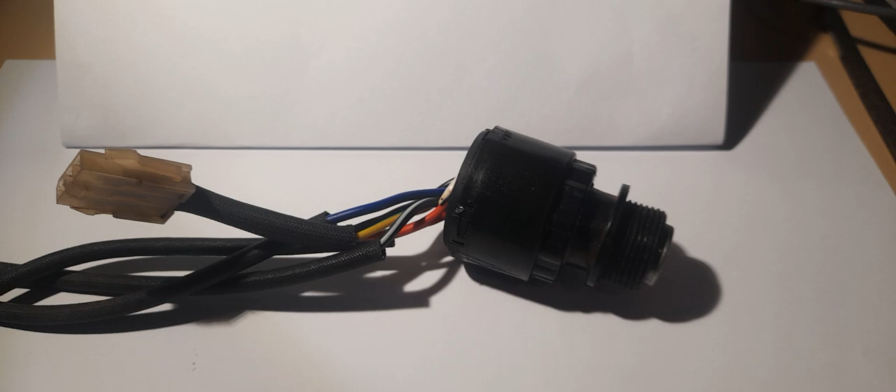Just a little video to explain how to pull apart one of the starter motor switches. This is off a Zongshen gb1000, which Jono and Jonno here in Australia sold us a jde1000.

They're very susceptible to dirt contamination, especially when you're using it in a dusty or dirty environment like I do. After a while they just clog up and you need more and more force to get the key to turn. Then eventually they won't turn, and eventually they break. It's the bit inside that broke, then the key just spins around and doesn't do anything.

Now to get them apart, you just lever up these little plastic tabs. There's a metal sheath over the top - you just knock that off, and then lever up that little tab there, that little tab there. Then this whole top plate pops off.

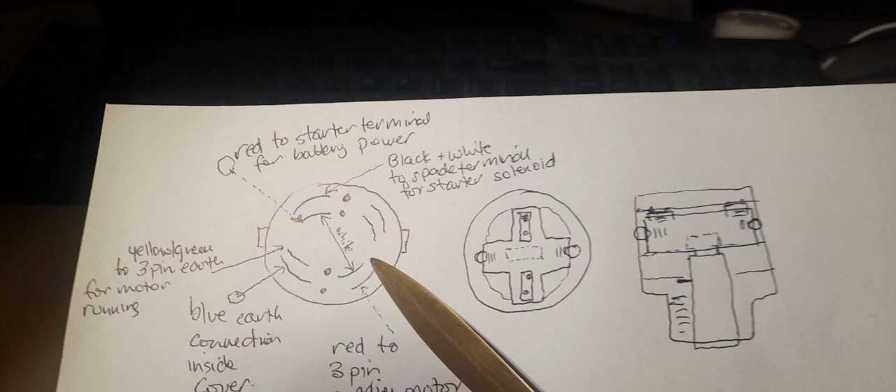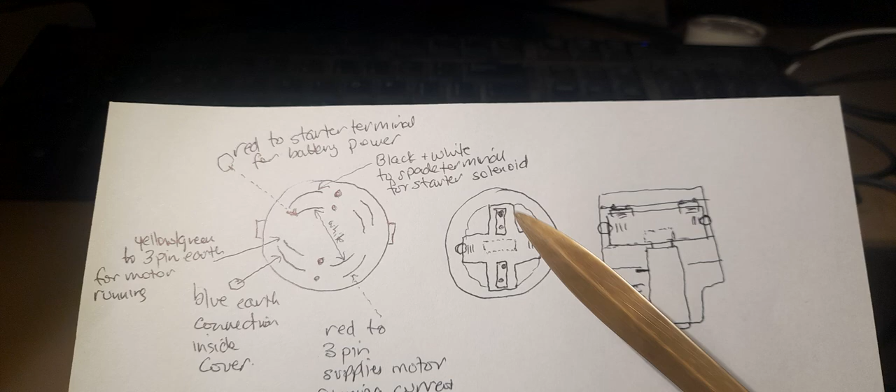Underneath the top plate you've got metal half little circular tracks, 8 of them. The some one entire section isn't connected, but the others - if you look at the little wiring diagram I put there, it explains what happens as you turn the key. It turns this little section here, which has got 2 sets of double contacts on it, and as they turn around they just make contact in between the tracks in various configurations.

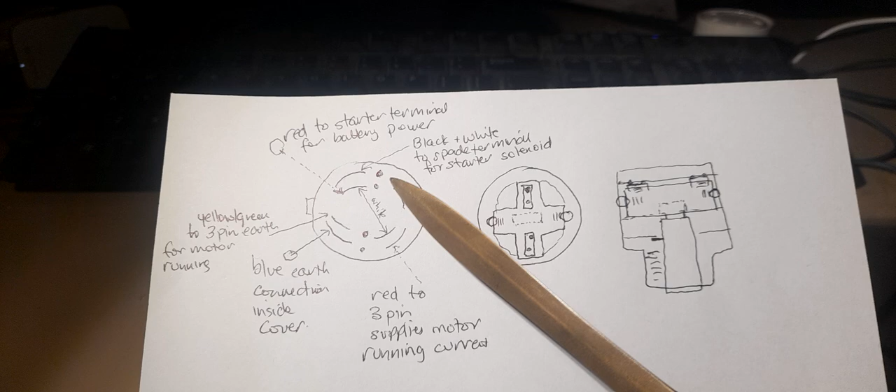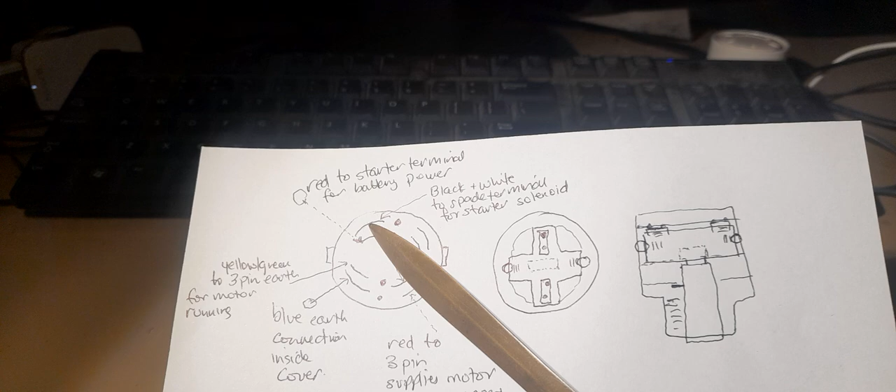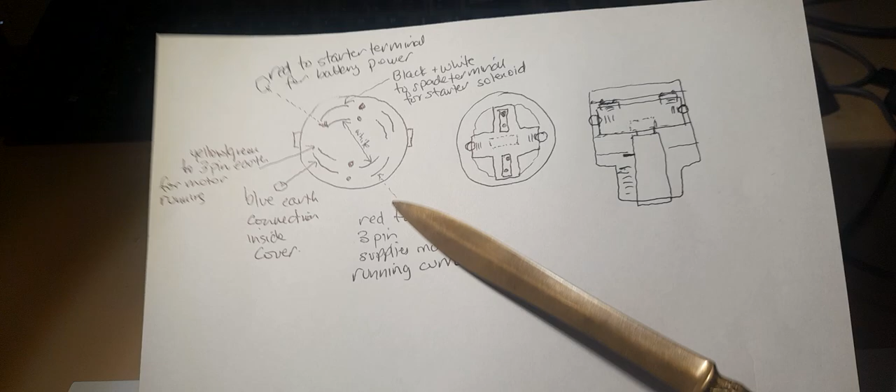There is a white wire inside that joins that track and that track, so that as it turns, the power comes in. Where does it come in? Oh anyway, it comes in on that one there, and as the contacts are made, it joins up here and then flips across to these ones here and supplies out the red terminal in there, the red wire going to there, and that supplies power to the motor for running.

And then the black and white one is connected to that one. So as it contacts there, that supplies power out to the spade terminal going to the solenoid on the starter motor.

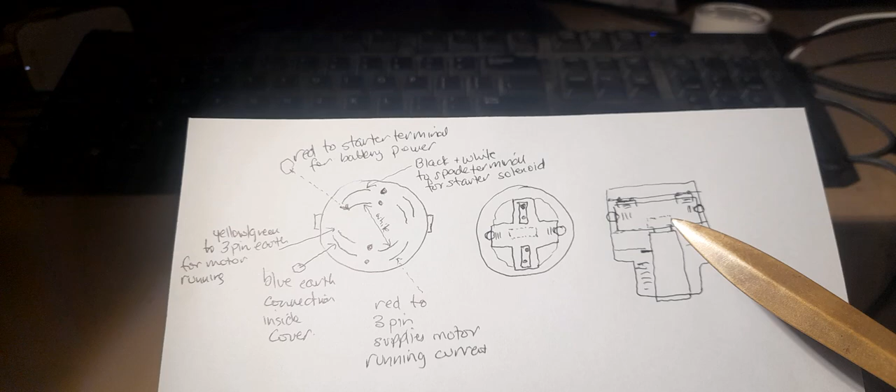Now the key goes in here, but then this little bit here is that plastic - crappy design, because as all this clogs up with dirt it becomes harder and harder to turn, and after a while you maybe just put a little bit too much force on it, or you've done it once too often, and that little bit there breaks off. And then the key just spins around.

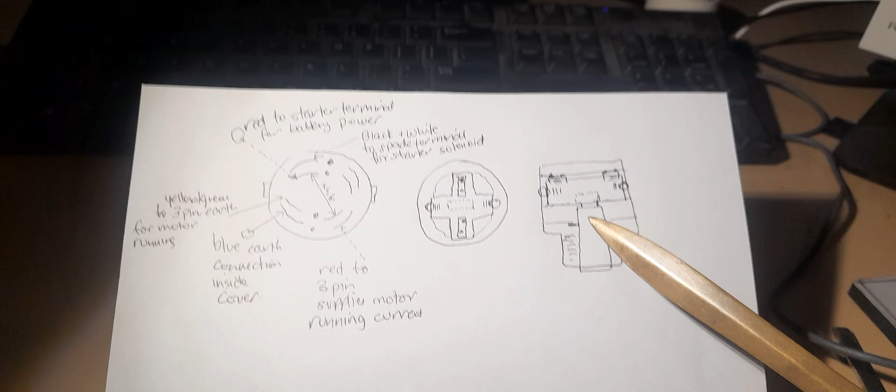Now as you pull this apart, keep a very good mark on the case and a good mark on this top plate so that you get the alignment back up in the right place. And the white contact holder inside, make sure you mark - hang on, where's my focus gone?

This white contactor plate in there, that can go in 2 or 3 different ways, so make sure you give it a good mark so you know exactly how to put it back in, because this has got a little spring wound around it here that connects to the case, and that gives you the spring for the starter actuation. That can go in a couple of different ways, so make sure you mark it.

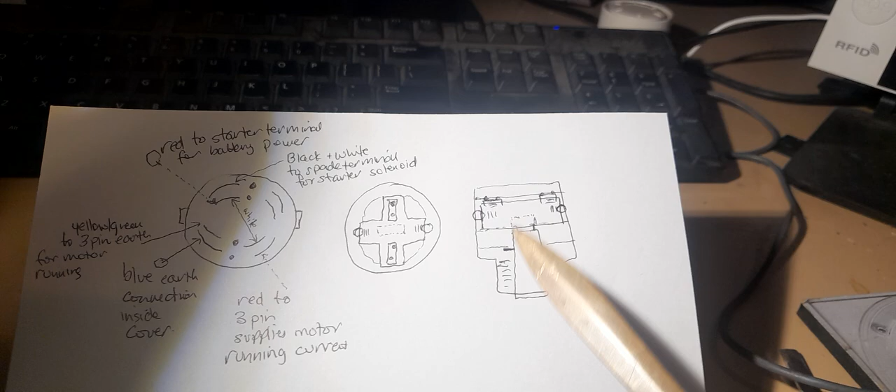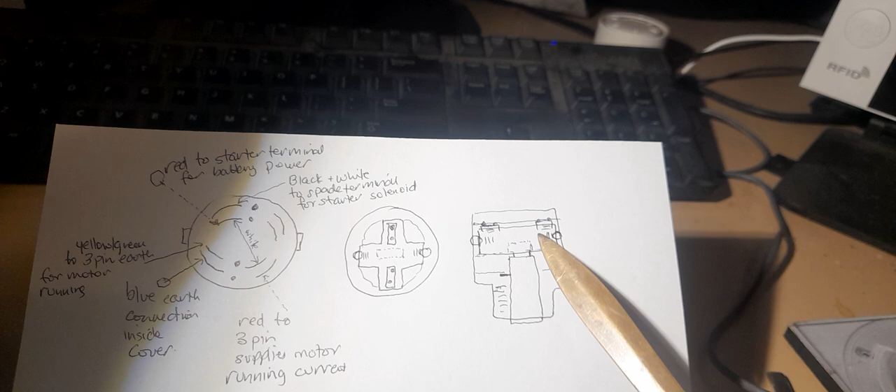Now these 2 little balls here give you the detent effect on this plate, and there's a couple of little springs in there. When you pull this out, the balls will tend to fly out, so just be very careful as you lift this up, and it's not too hard to fit the balls back into place as you push it back in again.

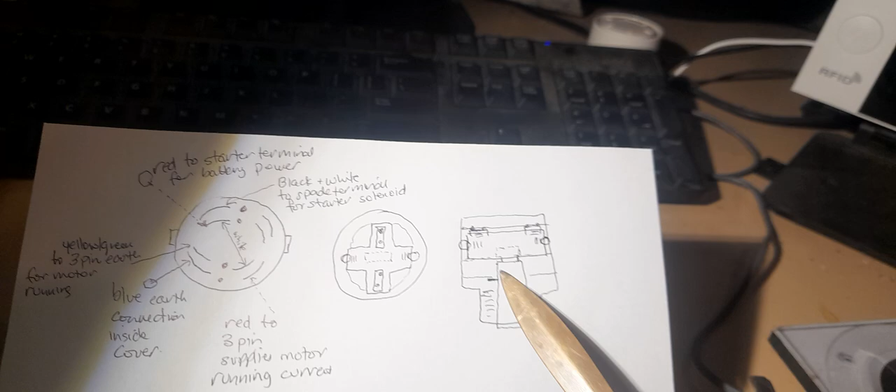Now what I did, there's a little, what's in effect a little circlip just there, just a little plate, and if you get a screwdriver or something like that and just push it back over, this whole lock mechanism falls out the bottom.

And then what I did was just removed all of it, because the key's not long enough to actually go right up there into that top plate. When this is broken off, once you've got it out, you've got an 8mm slot just there that this fits into, but the key's not quite long enough to go into it.

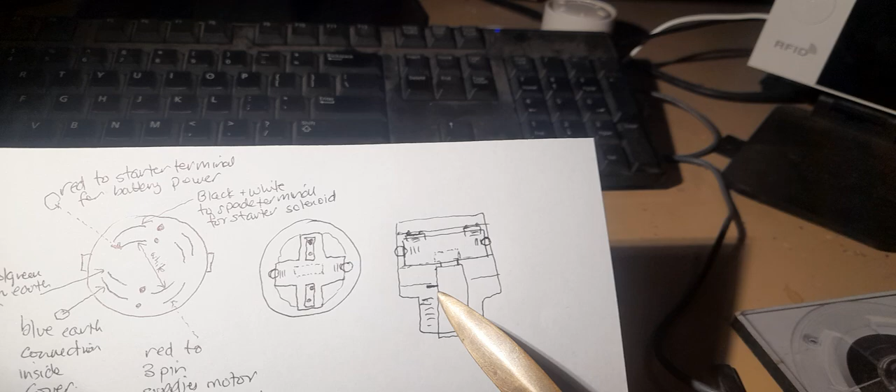So what I did was, after I dropped this out, moved that little plate across, dropped this out, I took all of the little locking pins, little locking plates out of the lock.

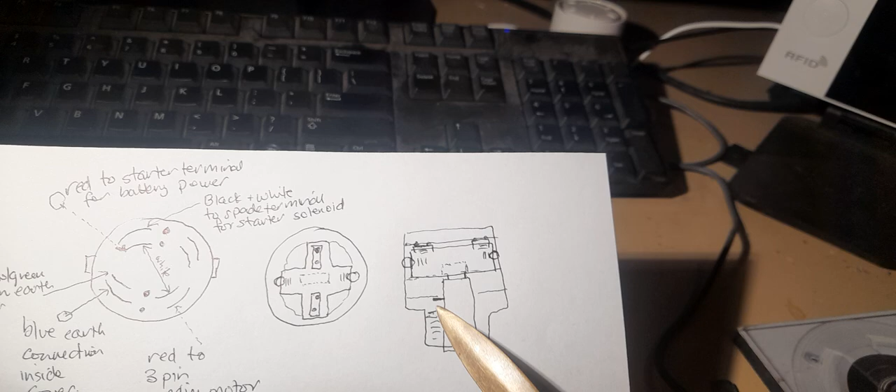And then just made up a bit - 8mm wide, and that thinner bit there has to be at least 32mm from there to the end. And then that just goes in there and turns, acts as a key.

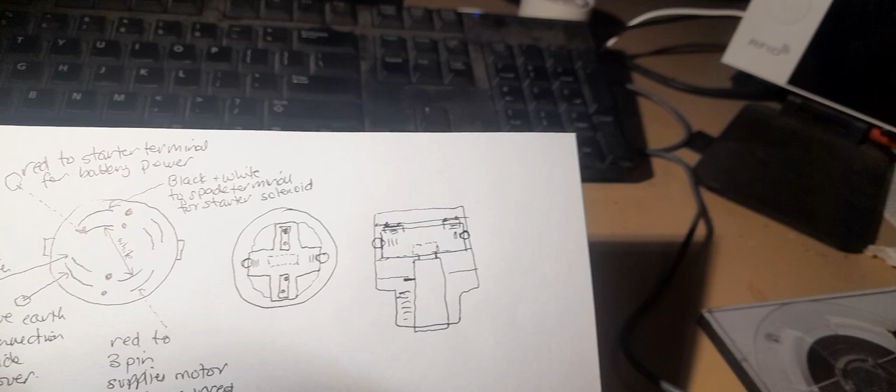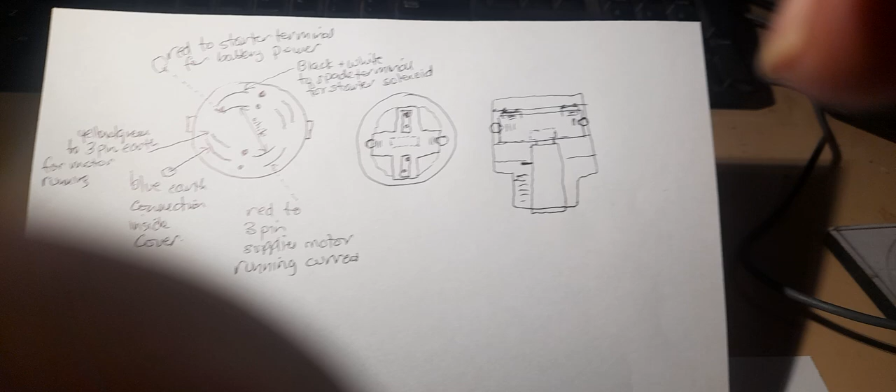And then you just put it all back together again, give it a good clean out, and put it all back together again, and try and do something to stop the dirt getting in there so it won't upset the contacts next time.

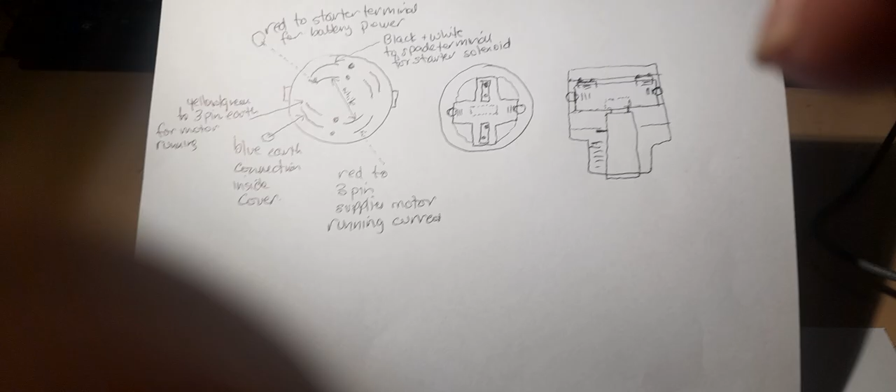Mine's had that much dirt in it that it's effectively worn one little contact off, but it still seems to be working all right. Now, anyway, this isn't much, but it's better than nothing. Good luck.